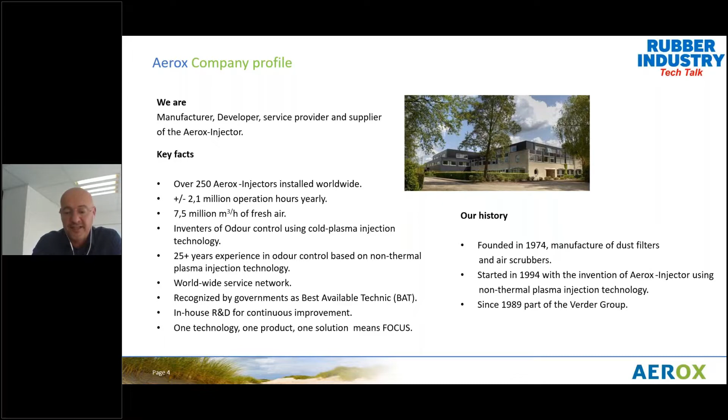So first I will tell you something about odor control in general, and at this moment specifically about the Aerox injector. I will now show a movie, and after that I will explain how our system works.

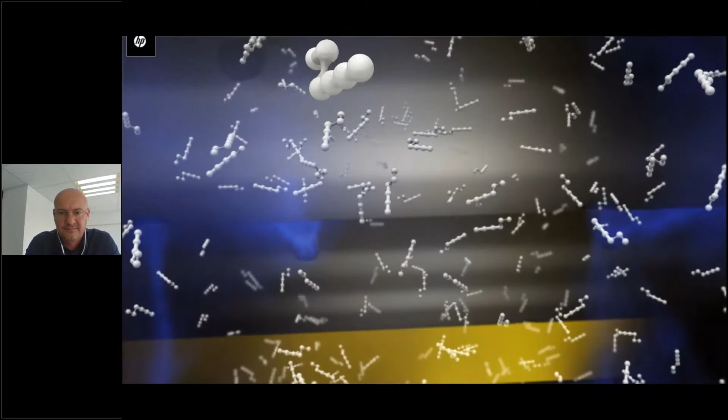The particles that we inject into the process duct react with the odorous particles. These odorous particles are organic molecules, and they are partly oxidized by the particles we inject. Because of this partial oxidation, we break the molecules into less odorous molecules, so that finally the smell is reduced by maybe 70, 80, or sometimes even 90%. What is very typical in the rubber industry is that we change the way the smell comes out of the chimney. So first you have a rubber smell from the process, but when we have treated the air, there's still a certain smell, but the typical rubber smell is gone. This is quite important for a lot of rubber factories.

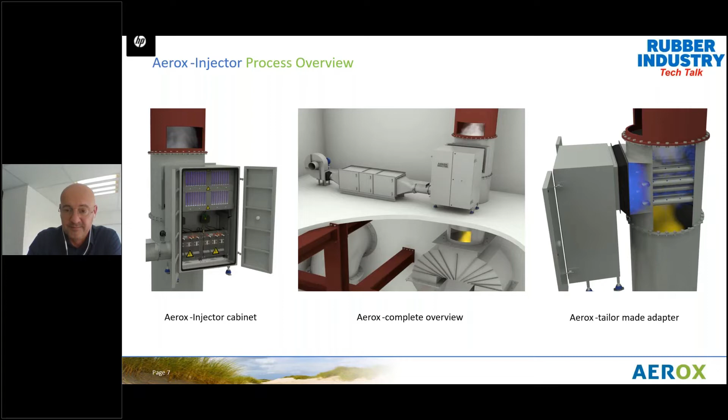So the Aerox injector can treat several types of air, several odor concentrations, and also several amounts of air. You can see that we can treat from about 5,000 cubic meters per hour up to 200,000 cubic meters per hour.

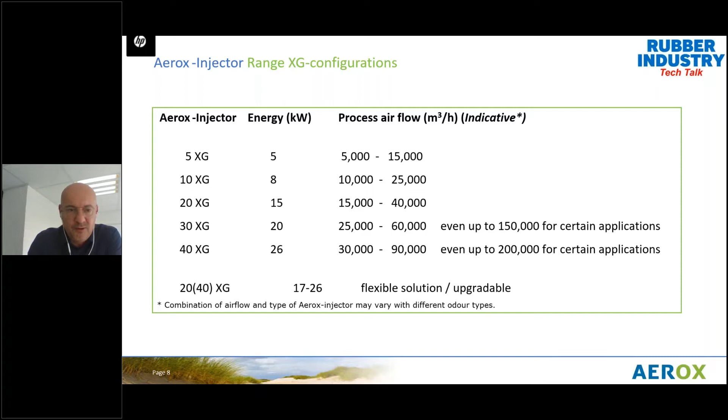How do we determine how much capacity we need? This is quite important, whether you need a small Aerox injector or a large one. We can determine this by doing two types of tests. The first is a suitcase test, which is quite a small test and more indicative. The second one is an official pilot test.

This is what we do often when clients are really interested in the system and want to know exactly how much odor reduction can be achieved with their process. We do such an official pilot test in many cases.

For tire production, every plant is approximately the same, but you can have a lot of different ingredients, and every tire producer has its own recipe. All these ingredients have an influence on the odor and on the components that cause it. This is why it's very important that we do a pilot test for every specific client, so we know how much capacity is needed and the client knows how much odor reduction or removal he can expect.

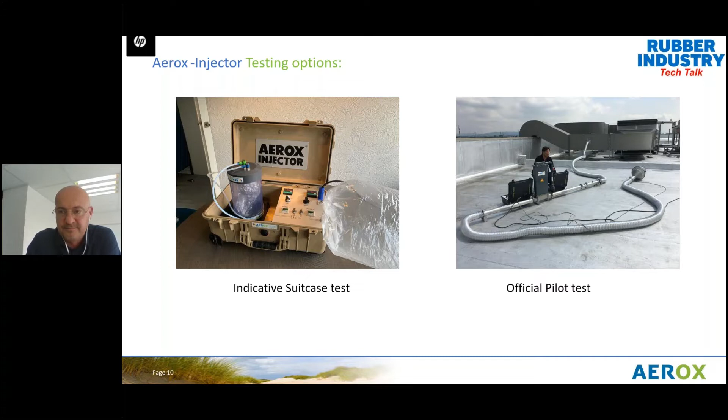In some cases, clients are already satisfied with 60% odor reduction because this is enough to take away complaints from neighbors, or it could be enough to comply with legislation from an environmental protection body.

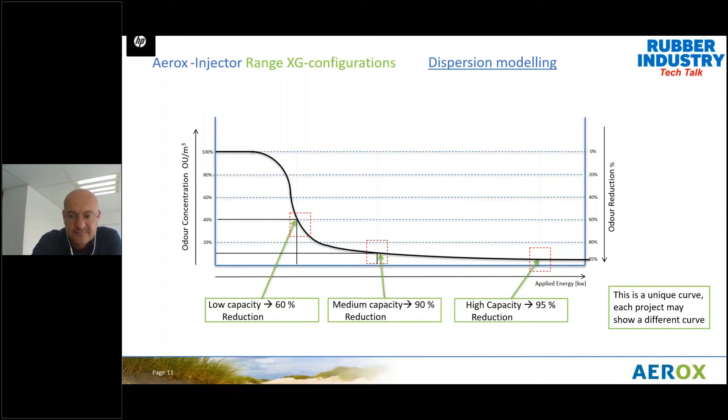This is quite a specific detail which odor consultancy companies produce. They put all the results of a test or an official measurement and introduce this into a calculation model, so they can calculate odor contours from a company.

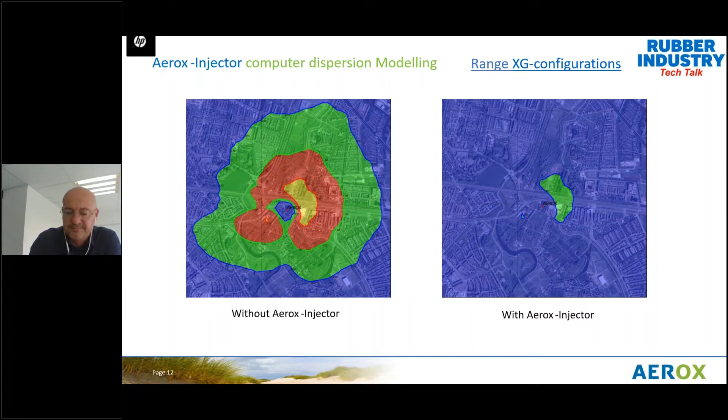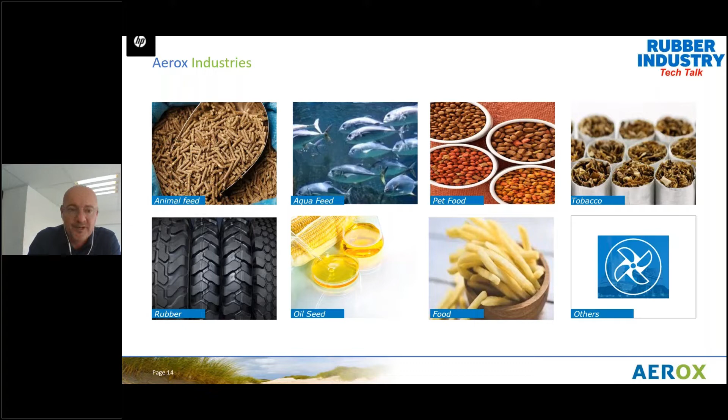Aerox is present in several industries, as you can see here. The rubber industry is getting more and more interesting for us because at this moment it is really a growing market. Due to Corona, we also saw that pet food companies are increasing, because many people bought pets during Corona. But rubber has been increasing for quite some years now.

Some key facts about the rubber industry: we had our first unit installed in 2006, and since then we have installed at least more than 50 units in the rubber tire industry.

The processes where we can achieve odor reduction, or that are relevant for it, are the mixing process, the batch off, and the curing process.

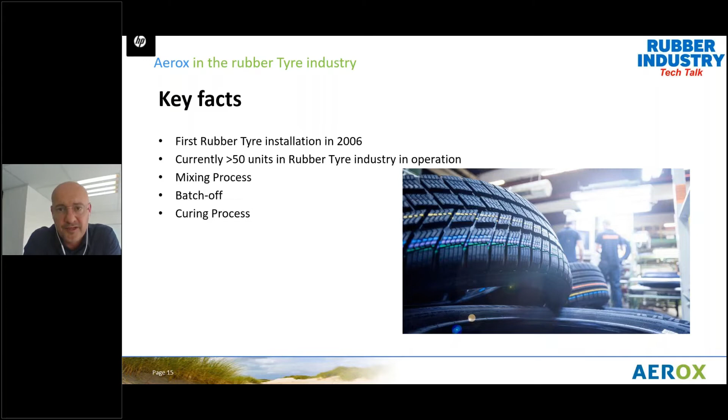In the mixing process, the air coming from a mixer is only process air, so the mixing chamber is not very big. Also, to avoid extracting too much heat from the process, you only want to extract a little amount of air from the mixer. A typical flow rate we see from a mixer we treat is about 5,000 to 30,000 cubic meters per hour.

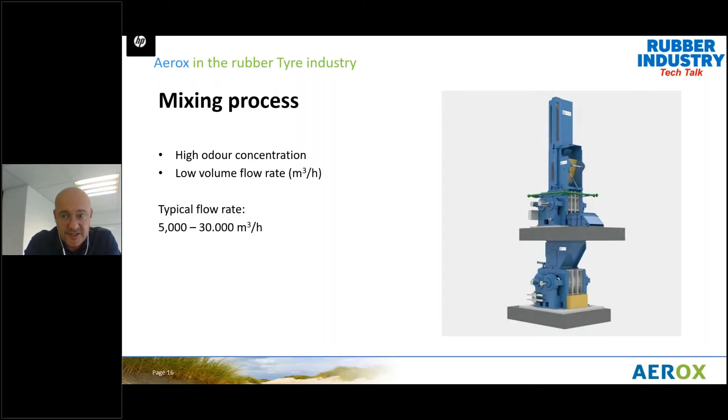But since you add the ingredients, the natural rubber, synthetic rubber, and all kinds of specific ingredients, and the first reactions take place there, a lot of odor comes from this process, so you have a high odor concentration here. With one of our systems, one Aerox injector, we can treat a maximum of about 40,000 cubic meters per hour of exhaust air.

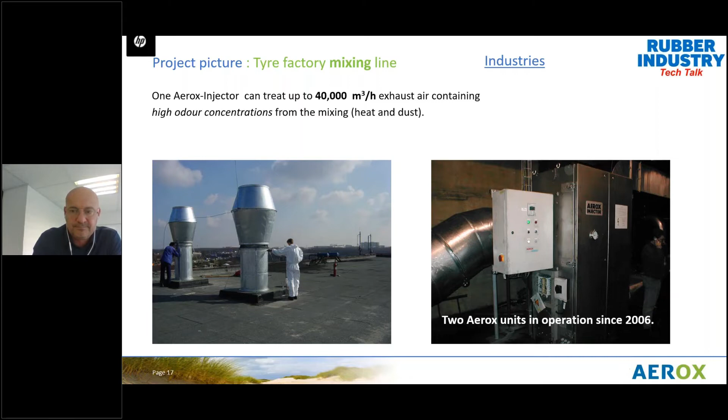The second part of the process relevant for odor control is the batch off. Sometimes it is combined with mixing, since batch off is close to the mixing process, but in many cases it is separate. Here we see a typical flow rate of about 20,000 to sometimes 150,000 cubic meters per hour. This is because in many cases there's a hood over the batch off process, so it's not only process air but also some ambient air from the hood, which is extracted and vented outside. Therefore you have a medium volume flow rate and also a medium odor concentration, not as high as from the mixing process.

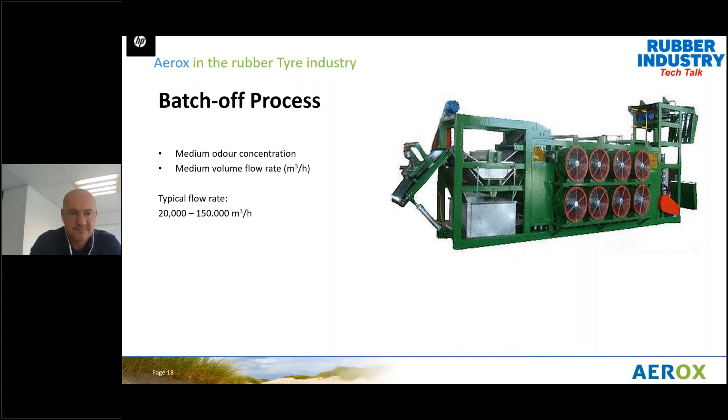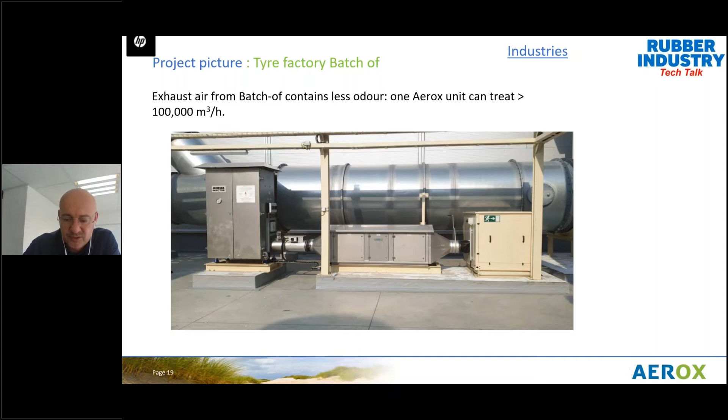So here you see a typical picture of an Aerox injector treating the air from the batch off process. We are treating here about 100,000 cubic meters per hour. You see it is quite a small system to treat a big amount of air.

Then the last one, the curing process. This is again completely different than the mixing process. We have here a low odor concentration, because the mixing or curing process takes place in a hall. When the presses open, you can see on the pictures the fumes from the tires, in many cases they just come into the hall. The hall where the curing process takes place is extracted to keep the climate in the factory okay for the employees.

But because the halls are in many cases quite big, you have a high volume flow rate. So sometimes it can be from 100,000 even up to 300,000 cubic meters per hour.

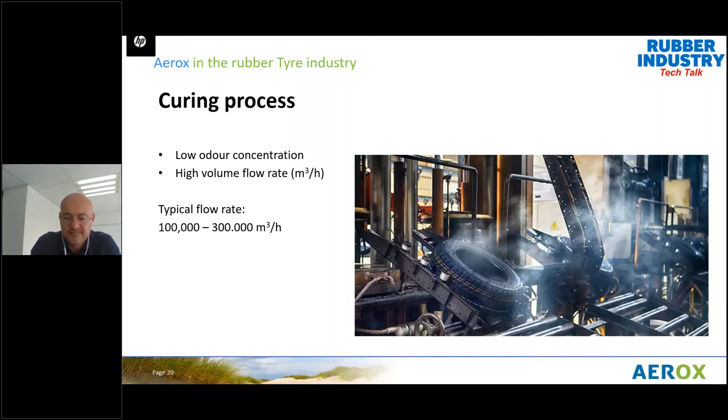So in this specific tire factory, 18 of the Aerox injectors are each treating 8,000 to 180,000 cubic meters of exhaust air coming from the curing lines. Each unit has a different capacity, of course.

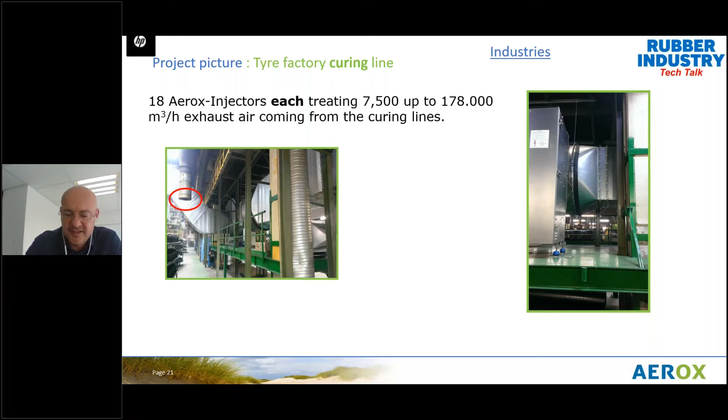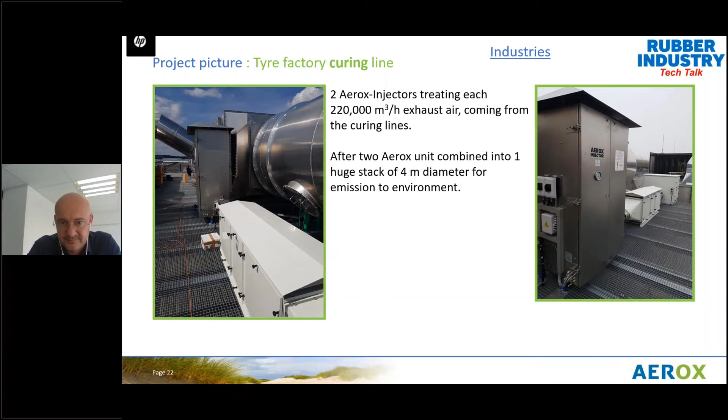So the clients that we have in the rubber tire industry, it is mostly rubber tire, but also, for example, in the belt production. Clients we have are Continental, Nexen, Bridgestone, Mitas, and Nokian.

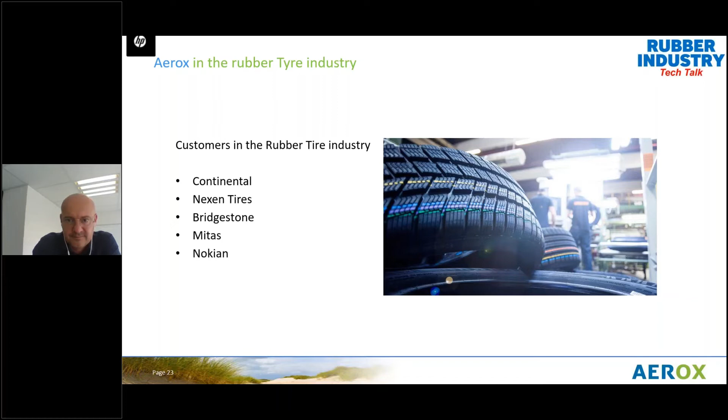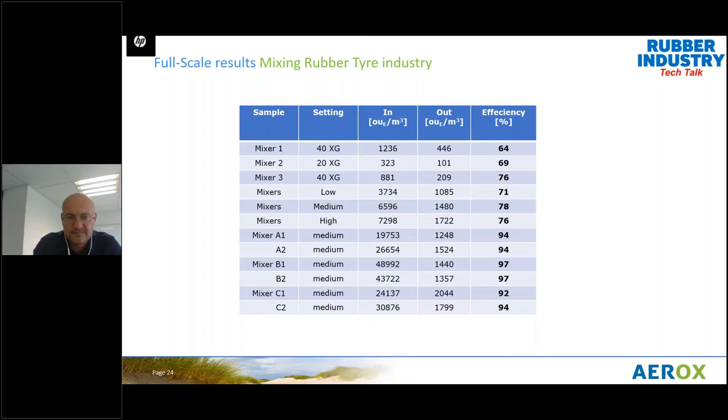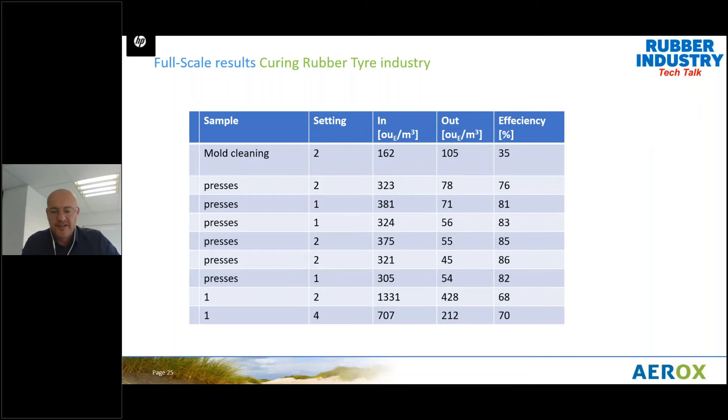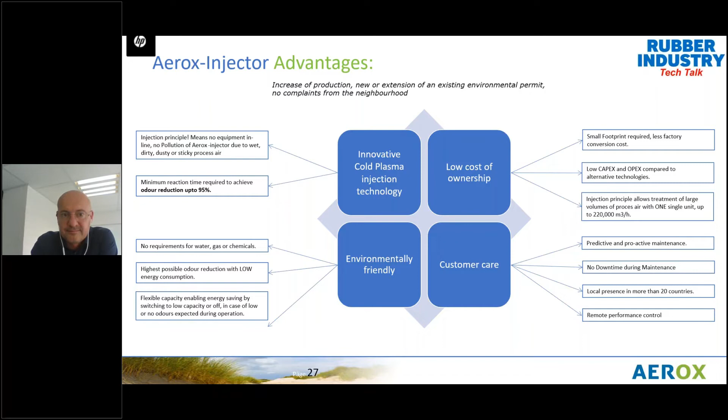So this was my presentation about odor reduction, and I hope this was interesting.

Thank you, Mirain. It's a very interesting presentation. I think you address real issues, particularly in the rubber industry. The mixing area is more troublesome. I have a few questions to ask you for the sake of all the audience and also from the industry point of view.

First thing is, you're talking to Asian countries. There are two things they always look at. Of course, as you know, the legislation is not that stringent. Sometimes they don't know what the parameter is to measure the odor control. And the second is, what is the investment cost? Can you talk about the cost of installing, particularly in the mixing area, which is, I think, the major smell producing section in the entire industry?

Yeah. We also have some units in Asia. We have units in Thailand and in China. Legislation is, for example, in China quite strict. So a lot of not only tire companies but all kinds of companies have to comply with very strict regulations, I think comparable to what is in Europe and some other countries.